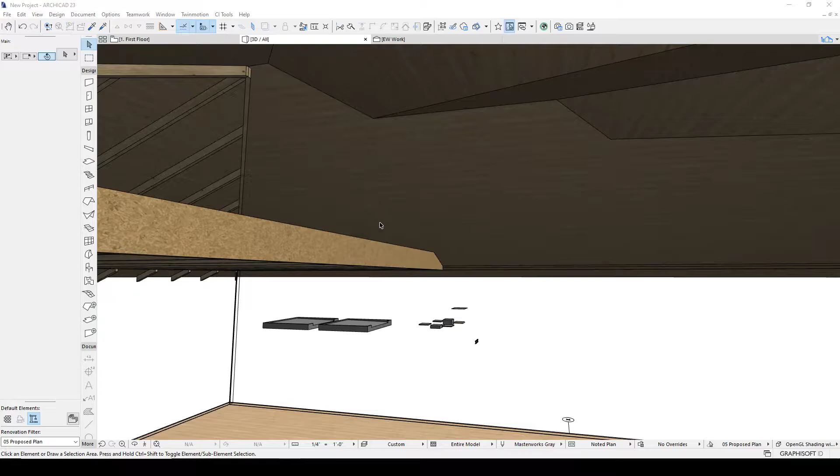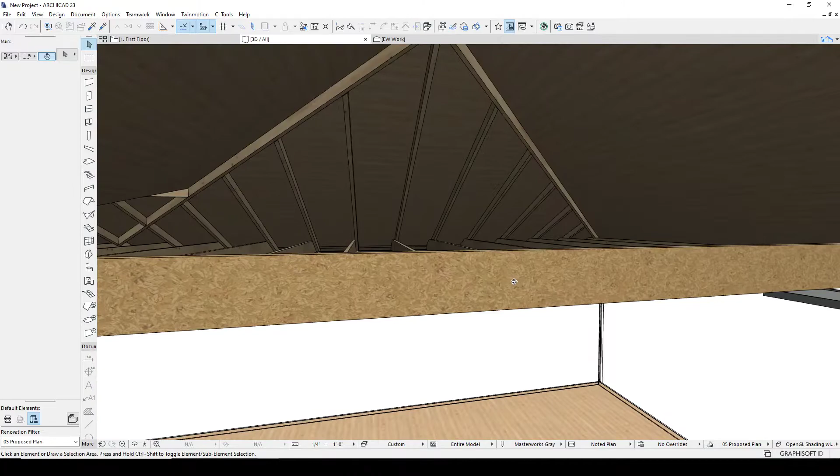In this video, we're going to be looking at the process of framing a roof, specifically a conventional roof. Here's what it's going to look like. So it's a little bit more involved than just doing the floors, but this whole process works pretty well, and I thought we'd start with this and then I'd do the other side, so at least you know what it looks like and where we're going. So all of these are using the same beam object. And let's get started on the other side.

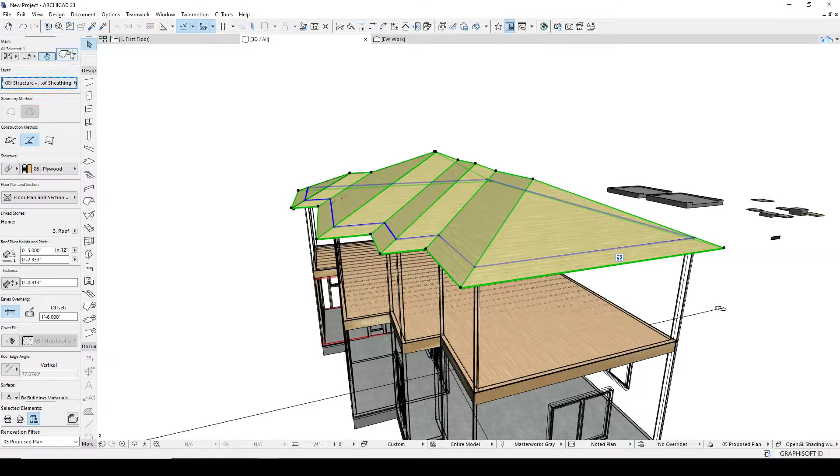So I think it's probably a good idea to see what layer this is on. Okay, it's on foundation, which isn't the right choice. Actually, I'm going to do new structure, roof sheathing. And then I can wireframe that if we want. We don't have to. So again, these are using the same objects that we've been using for everything else. So I'll start in 2D. I think that's a little easier.

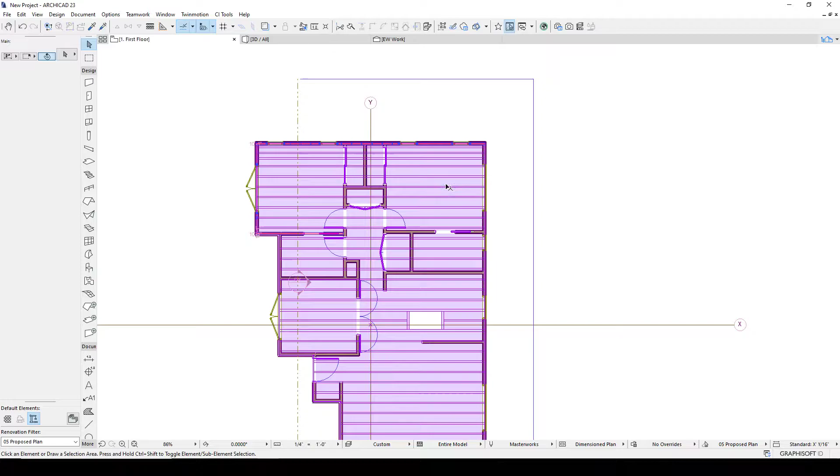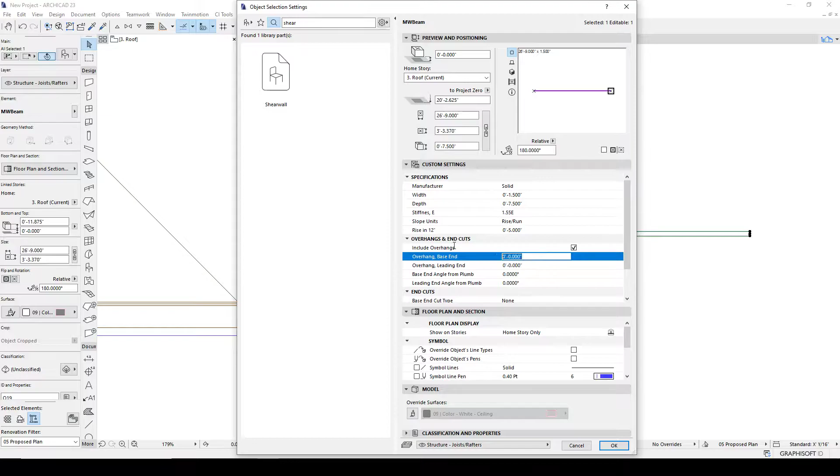So just to show you how to get started, here's a straight up beam. We're going to turn that into solid lumber, 1.5 by 7.5, 2x8. And we want this to have a rise and run of 5. That's correct. We do want overhangs. I think we're using 18 inches on the other side.

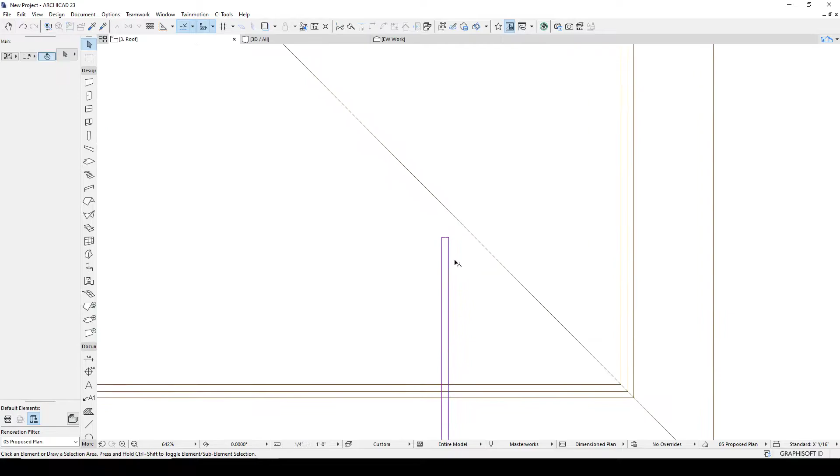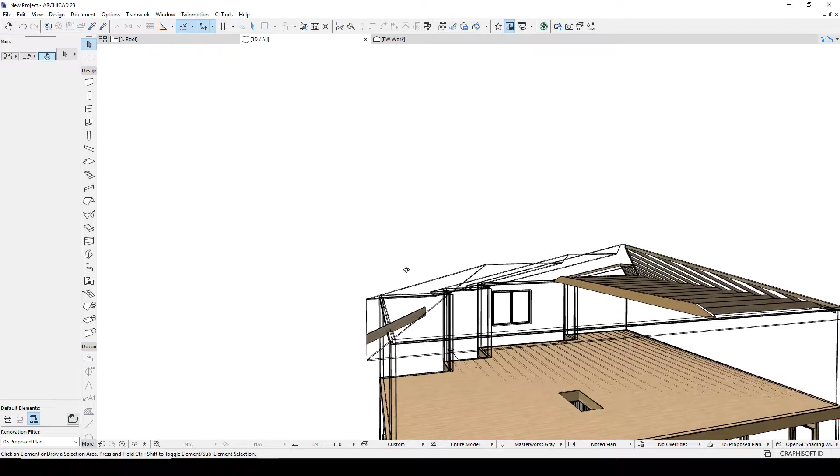I'm going to rotate this so it's up. That's our insertion point. We'll make sure we get the right spot in a second. Get this a little closer where it needs to go. Now we look at this in 3D. And there you are. So this roof was set up for 2x4s, so we're up and out of the roof, which is not ideal. So let's go ahead and change this back to a 2x4, or we change the other ones to 2x8.

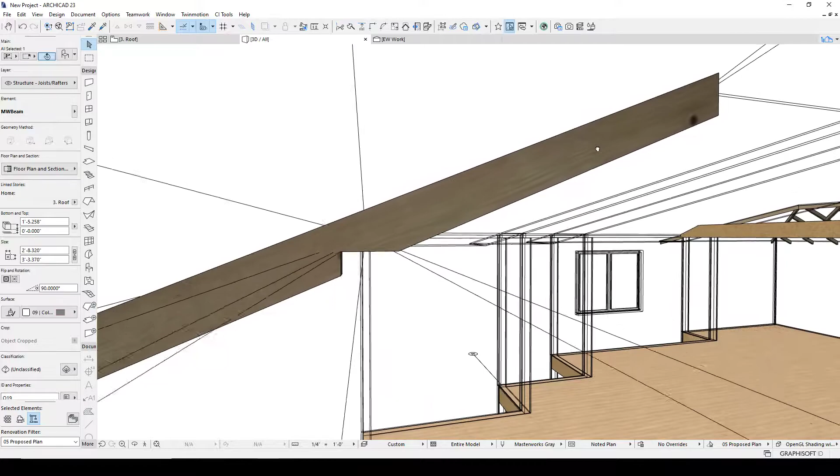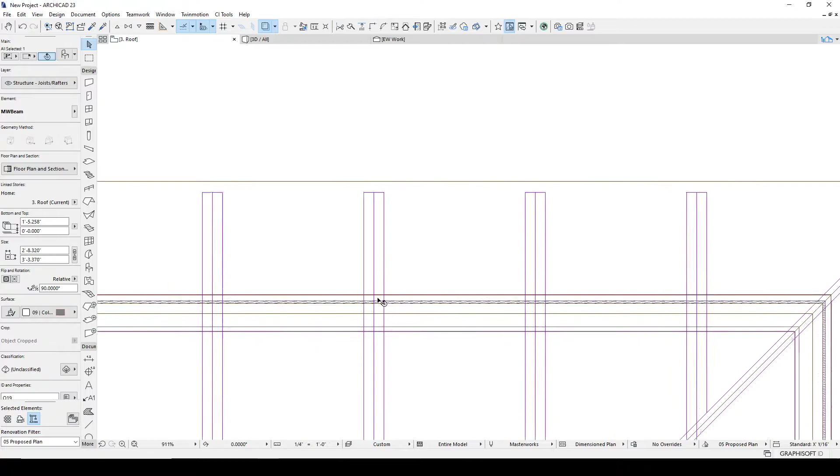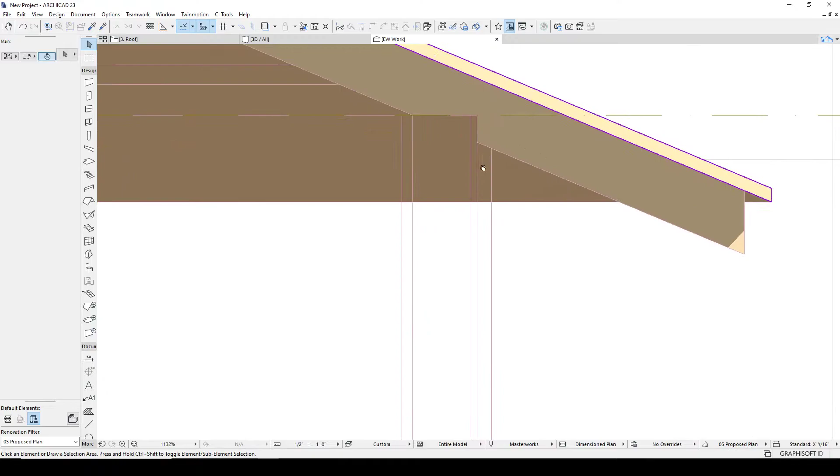So there's a rafter. And we're not necessarily sitting at the right spot. So let's trace the story below. Actually this should be at the shear. That's what we did over here. 60. And our seat cut, 3/8 plywood, so it's 2x4 and 3/8. That's correct. Nothing at the top. I'm happy with that. And when you're getting started, I recommend using a section. Perfect. We're right in there, right where we want to be.

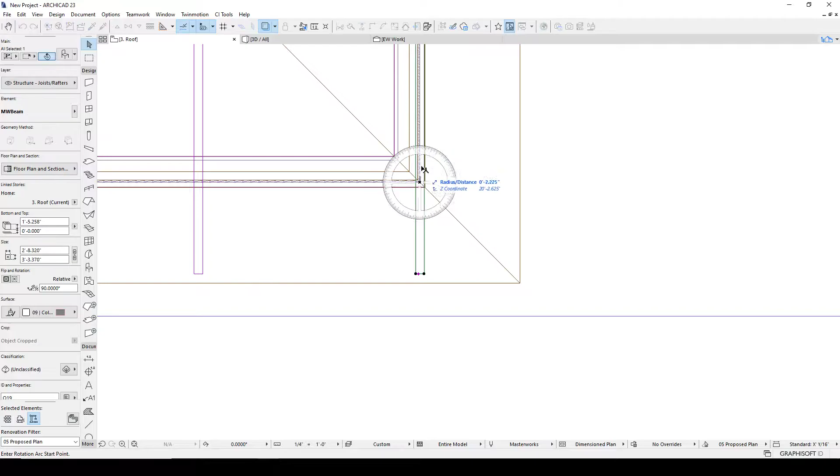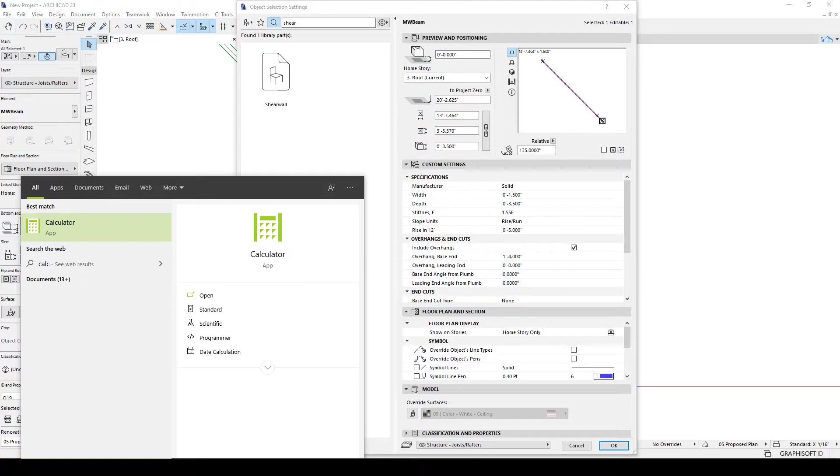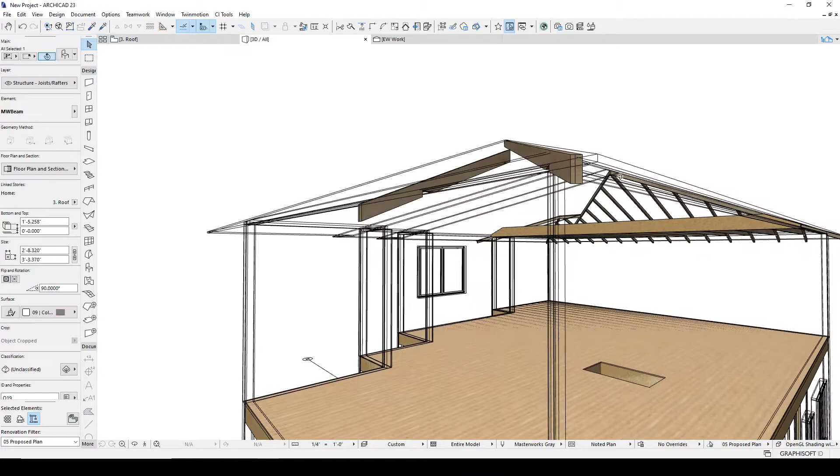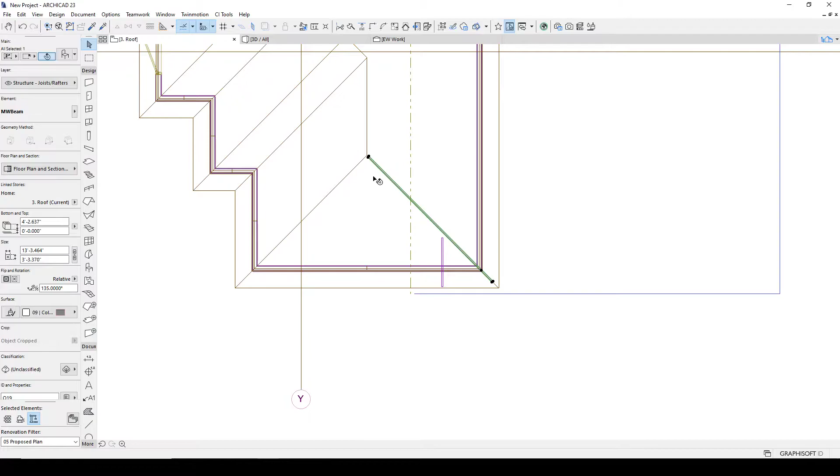That is the slope for a hip. So the 1.414 is the square root of 2. And so if we divide the rise by the square root of 2, we get the slope that's now parallel to the roof, which is what we want. And we go back to the plan. Now this seat cut needs to be, we'll do 7 1/8.

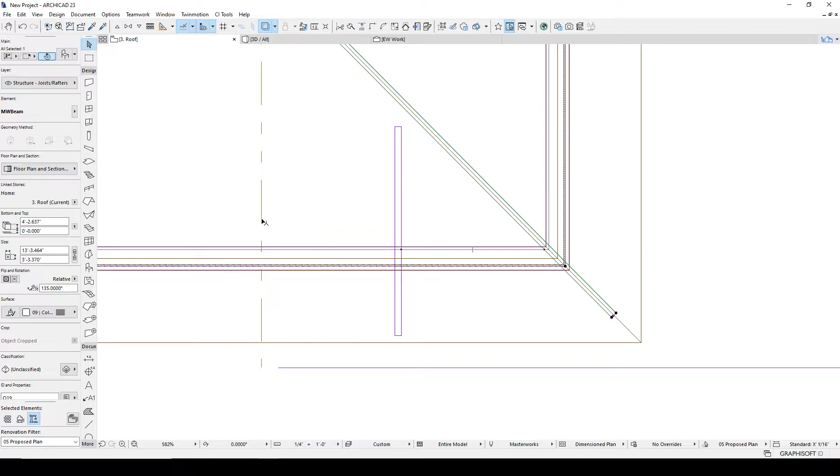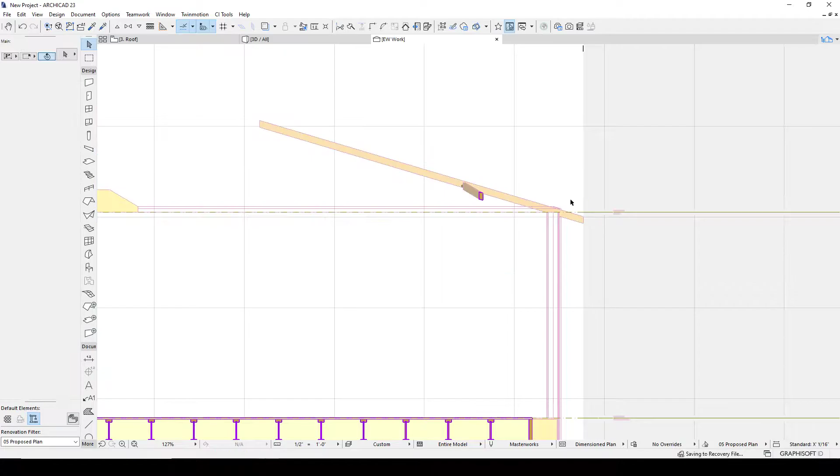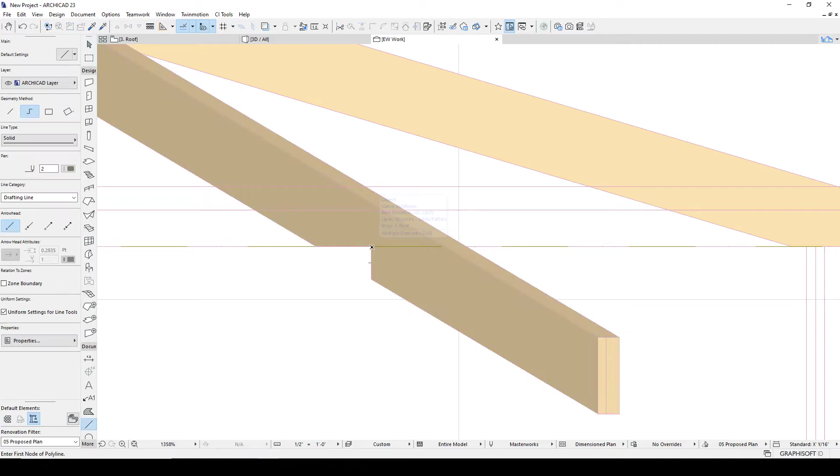And the way this works, that's going to make the joist drop, which is not really what we want to do. We're going to take our section, hide the plywood. And our stand, actually back. Project a line up to this corner.

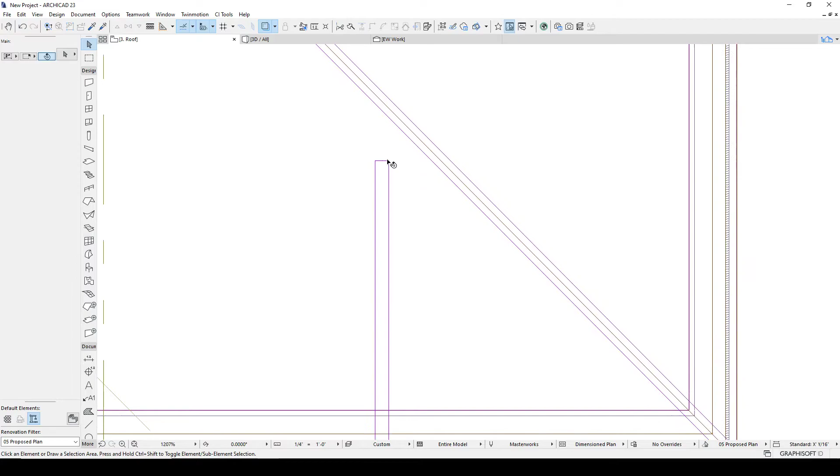.628. So what we do is right in here. Wrong, negative sign. And now the joist is up, the hip member is where it needs to be. That's great. We're going to spin this back around. And now we need to decide where we want this. You could start with one. We'll start with one center and then we'll spread it 2 feet.

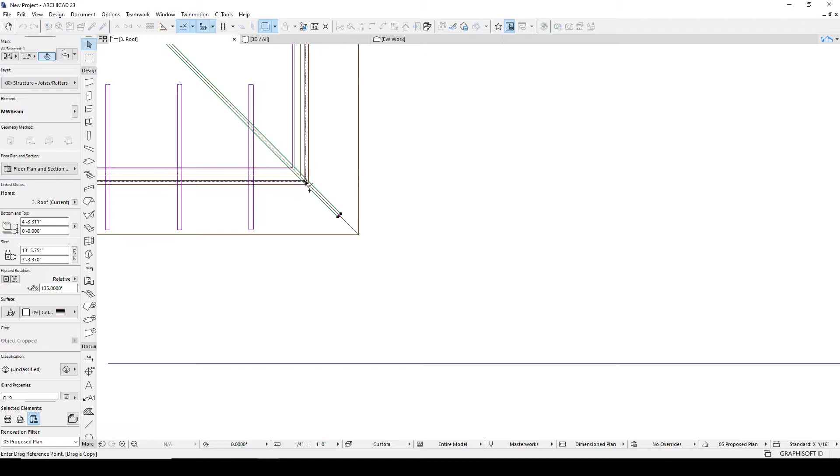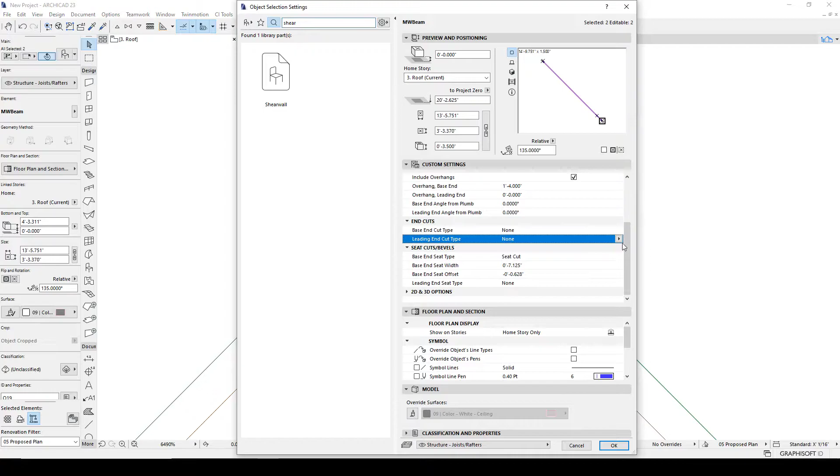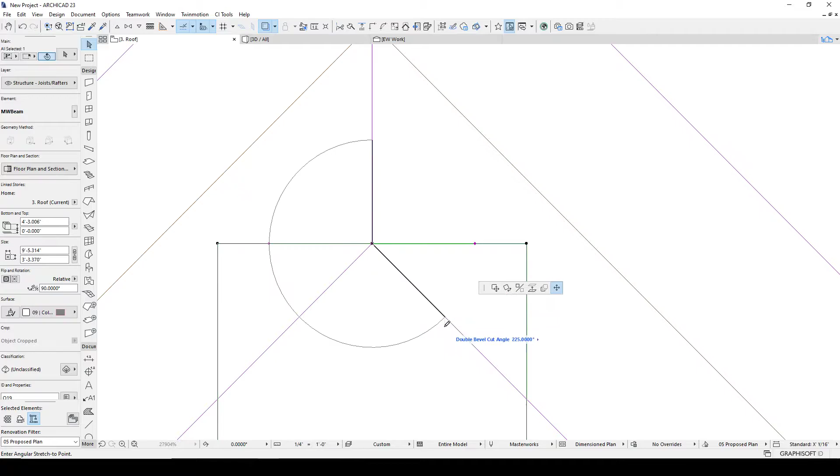Bring this up. And you've got to decide how you want to frame this. A lot of different ways to do those junctions. Notice I chose to copy and not mirror. Mirror was tempting, but I don't like to have my objects mirrored if I don't have to. So here, the leading end cut, I want bevel to horizontal. And what this allows me to do is to miter these guys in. Then I can take this guy, bring that into there, bevel to horizontal. Frame that in.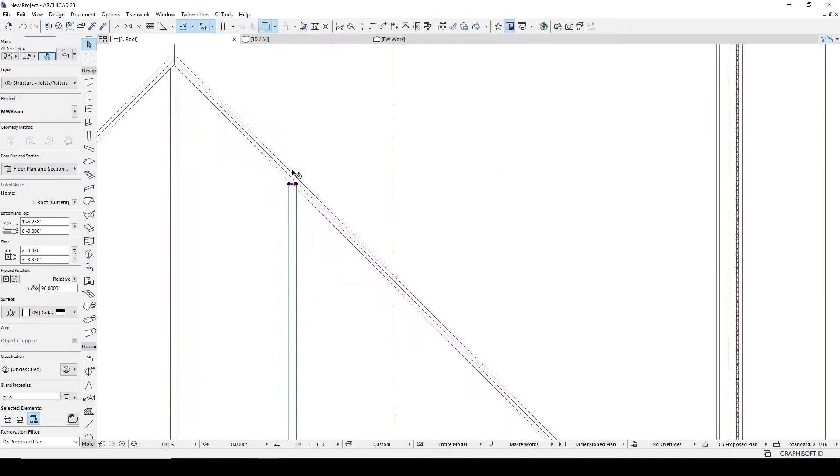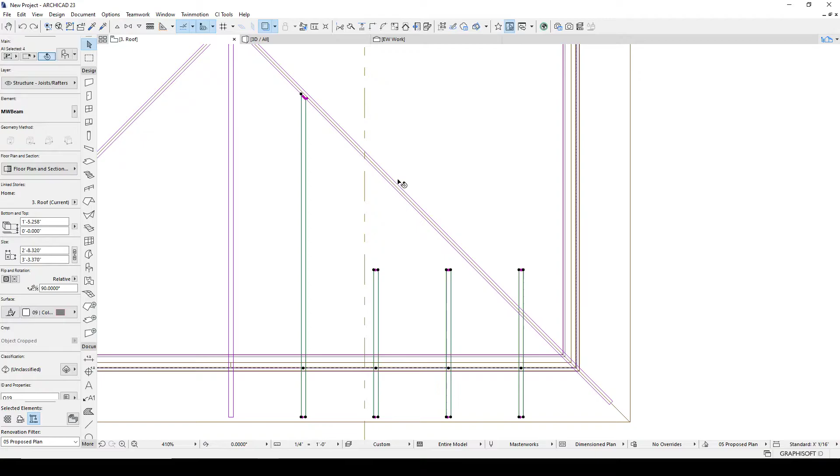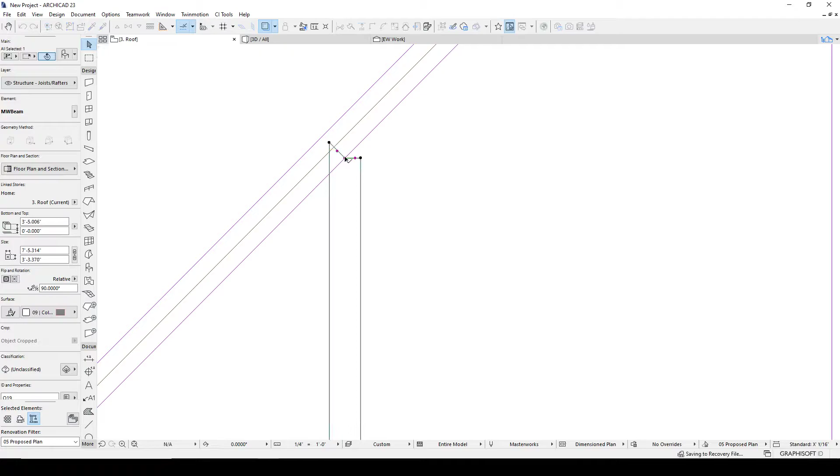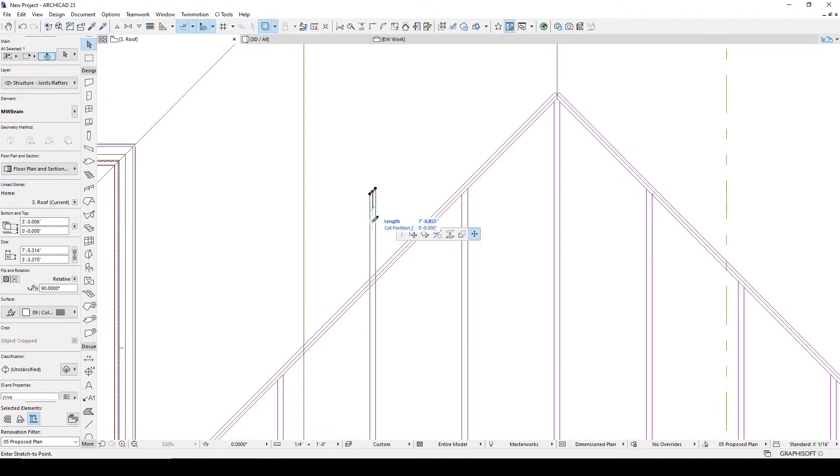And you have a choice. You can just drag this over that way if you want. You can also do it this way. F9. And remember, don't really want to mirror it. It's very tempting. Try not to do it. It's a little faster initially, but then it's easy to make a mistake later. And there you go. Whole panel's done in just a few minutes.

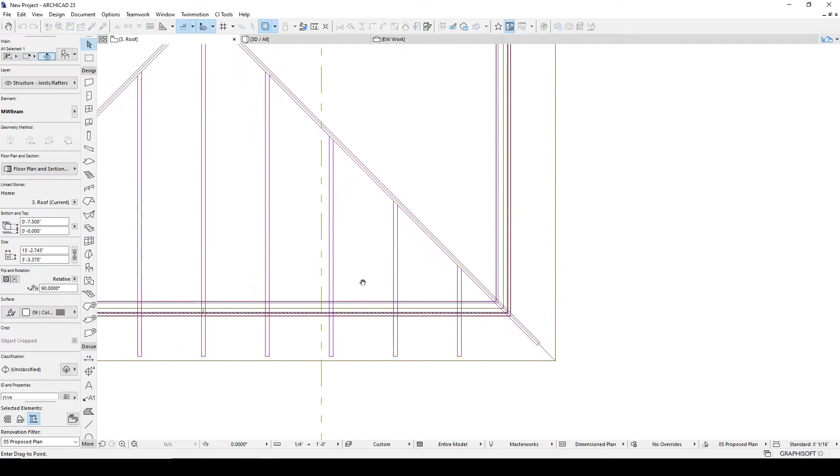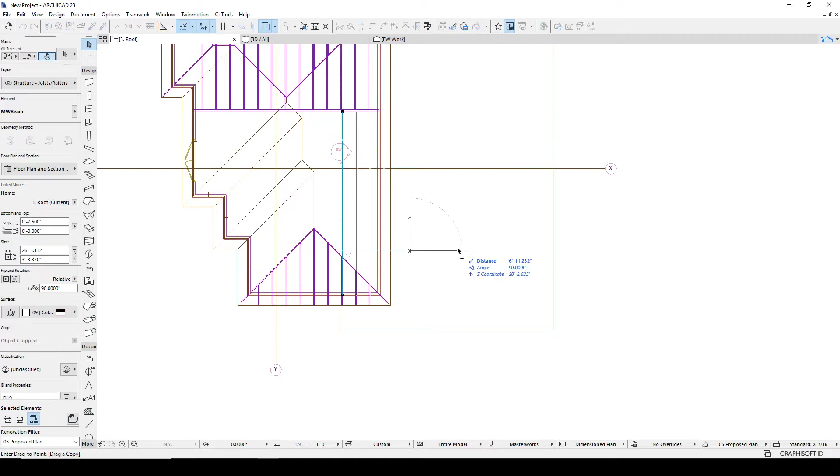I'll go ahead and take some of these ceiling joists, rotate a copy. I'm going to take my overhangs off. And wherever they're going, I'll just take them all the way across here. Shift M works great.

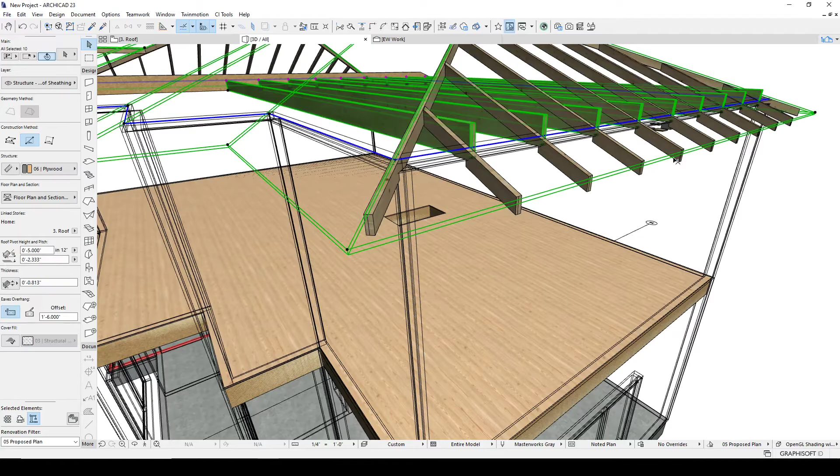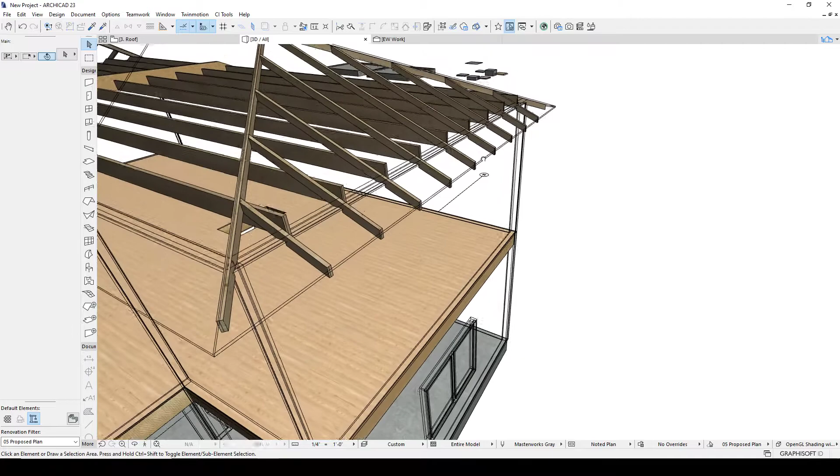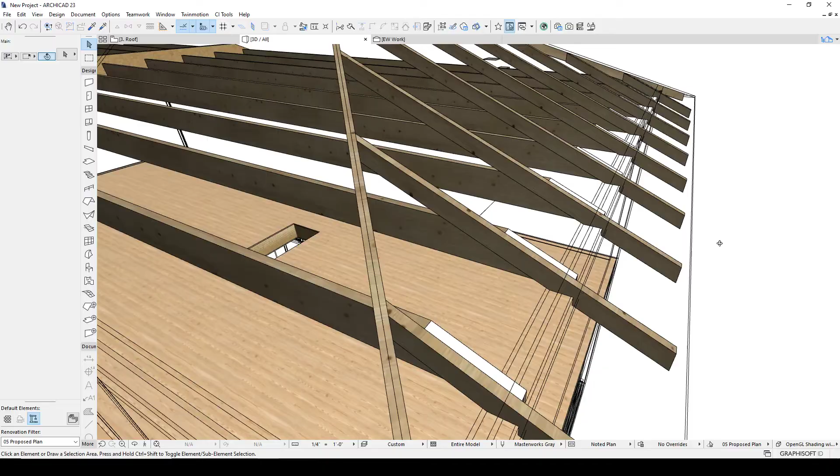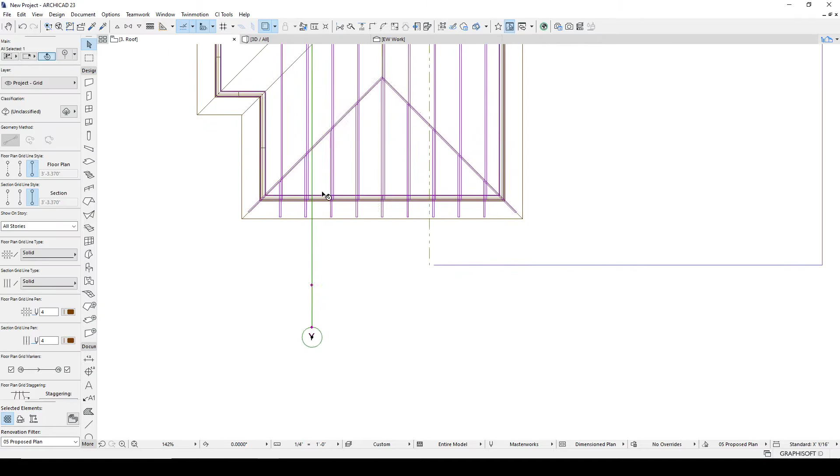So I trim the, I think it was a roof trim. You can either do it a solid element operation or trim. Connect, trim to roof. Boom, done. And I think that pretty much wraps it up. Yep, there it is behind. Running to this beam. Got our rafters going up. And it's just a matter of continuing that on.

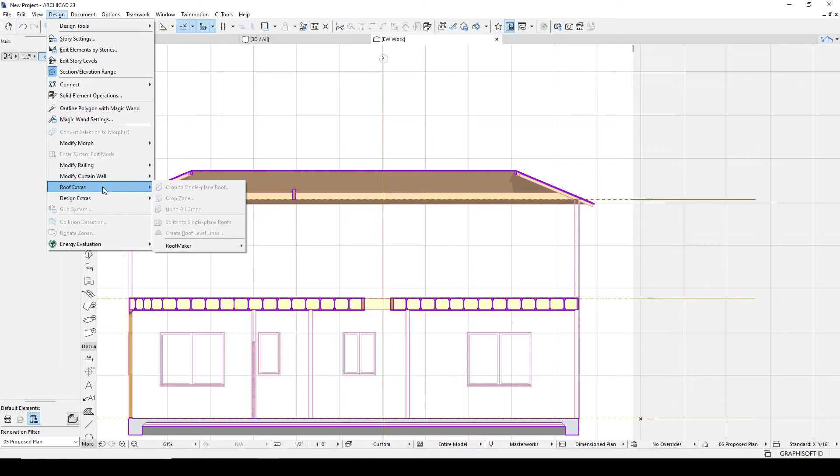Now I will mention that if you're in a real hurry and don't need the same control over your roof, there is something called Roof Maker, and it does a really nice job. It's more automated, doesn't give you the same quality of object, but if you just need to rough something out really fast, you can go to Roof Maker, create a roof, and what did it say? You may have to split them into single planes.

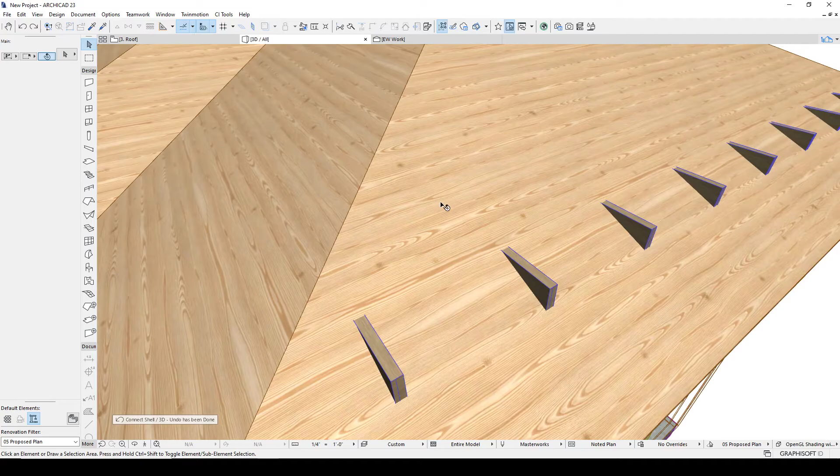So this is where you set the parameters for the rafter, but we want the roof wizard. That's what I'm doing wrong. Let me bring that. Sorry about that. Roof Maker. Looks like I need to be in 2D. Extras, Roof Maker, Roof Wizard. That's what I was doing wrong. And you set up all these parameters. And you want to take a minute to get them all just right.

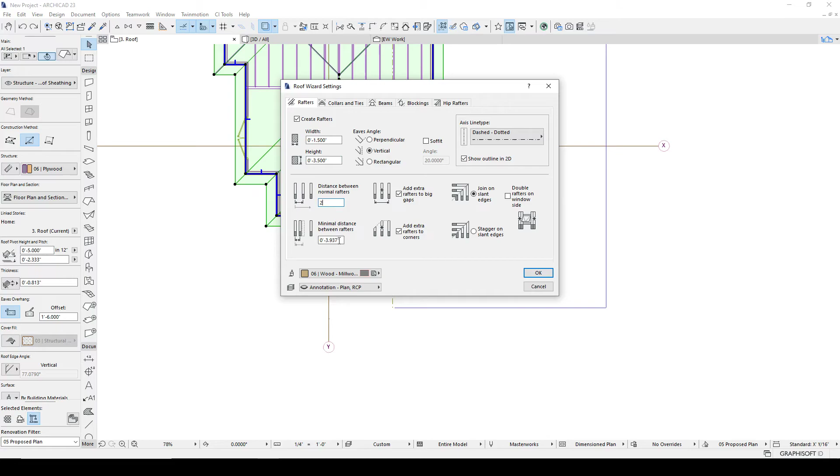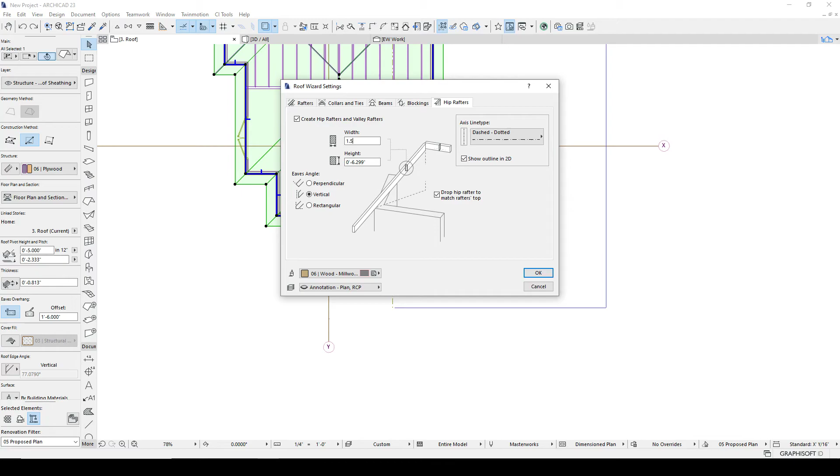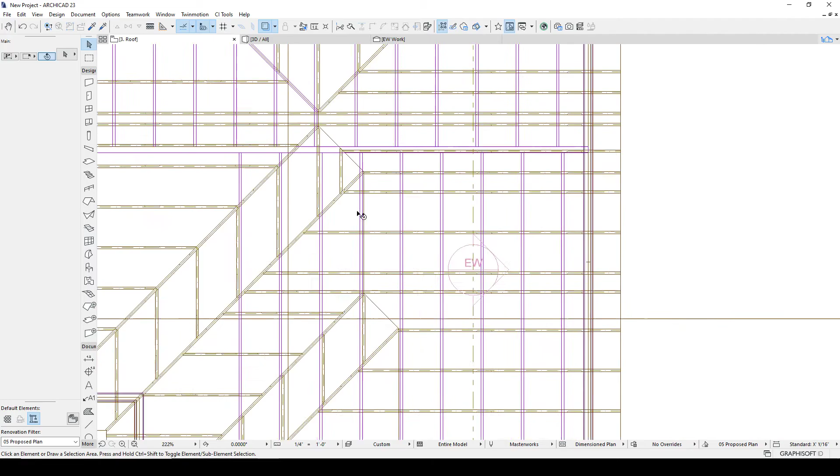No collar ties, no beams, no plates. Put this on the right layer and hit OK. And it drops all these objects in. It does all the framing. So it's great because it very quickly framed your roof. I mean, that's impressive.

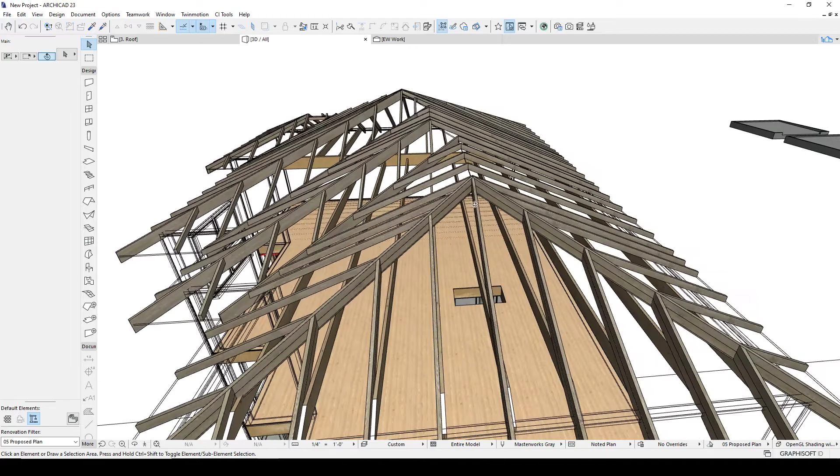The objects it uses are not quite as easy to use. So initially it's very fast, and sometimes that's good enough if you just need to get that roughed in. But if you want the control to do the correct framing, then use the Masterworks object. So there's a couple options for you.